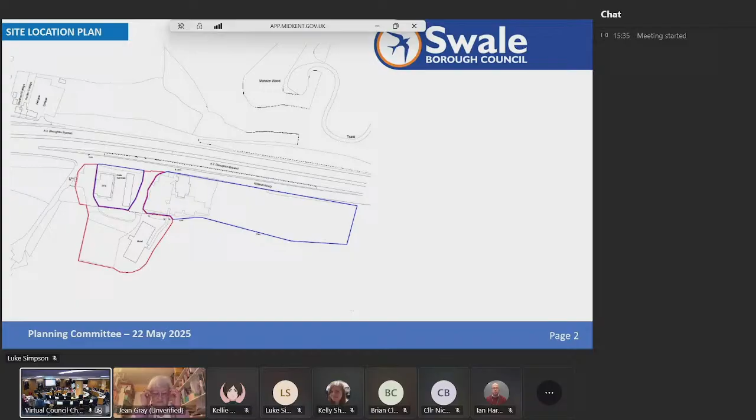Sorry, apologies for that. So as you can see, it's situated between A2 London Road and the Blean Woods South local wildlife site, which encloses the site to the east, south and west. The woodland is designated as protected ancient woodland. It's covered by tree preservation orders.

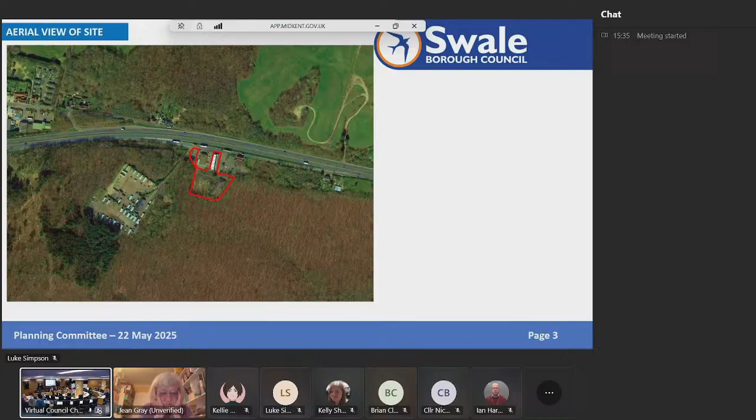There's just an aerial image just to provide a little bit more context. The application seeks consent for the construction of a new restaurant with drive-through facility, car parking, landscaping and associated works, following the demolition of the former hotel, which has already occurred following a successful demolition notice application that was previously submitted. The new restaurant will be located on an existing area of hard standing to the south of the petrol station, with the location of the former hotel being utilised for the provision of car parking and landscaping.

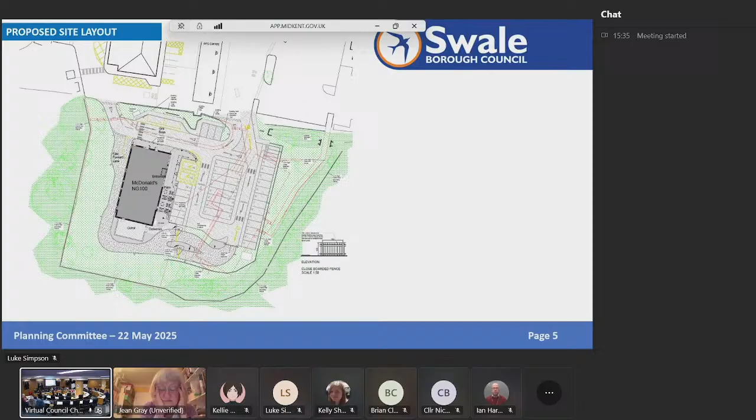It will be accessed through the service station service area, and the existing openings to the site would be maintained with a new internal route arranged to circulate traffic around the petrol station. In total, 37 car parking spaces will be provided, in addition to 2 disability bays, 4 motorcycle parking spaces and 3 or 4 EV charging bays to be confirmed.

An extensive landscaping scheme is proposed, which includes the planting of a significant number of native species along the southern and western edges of the site, as well as a new landscape strip, which is proposed to enable retention of vegetated screening along the northern edge. A large area of mixed planting and scrub is also proposed along the eastern and southern edges, which would provide a buffer to the ancient woodland.

The landscaping scheme also forms part of a detailed biodiversity enhancement plan, which when combined with the purchasing of habitat units for off-site habitat contributions, would provide a 10% net gain to meet the requirements set out within the Boughton and Dunkirk neighbourhood plan.

Now this slide shows the elevations of the former Travelodge, and I think it's worth noting that the site has been part of a roadside service area since 1976, and for many years has provided parking and services for the former Travelodge and the petrol filling station.

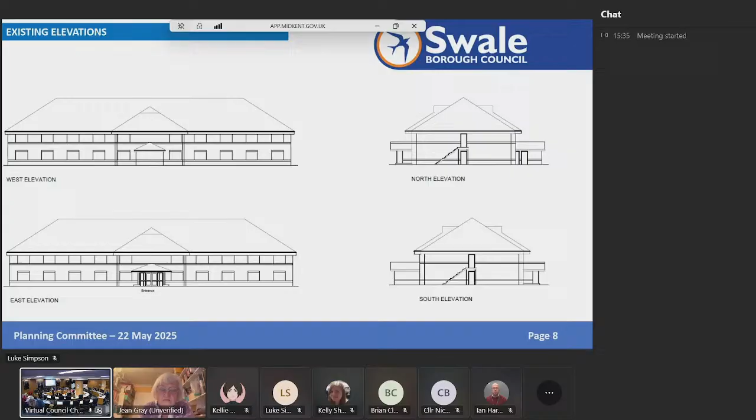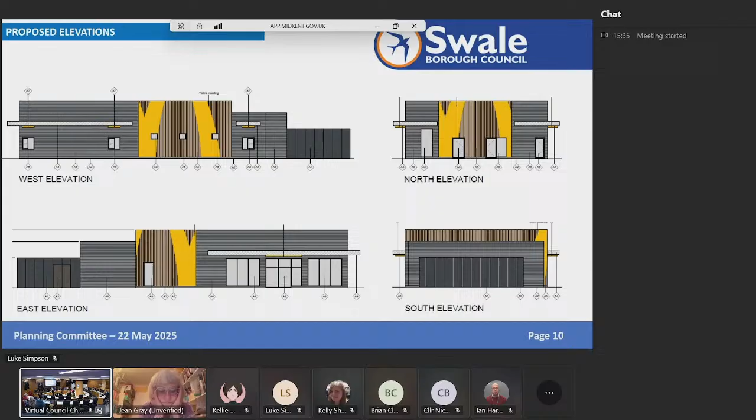Now, just to go for some elevations, that's the proposed elevations of the proposed restaurant. Floor plans and roof plan. The floor plan shows a dining area that covers 79 seating spaces.

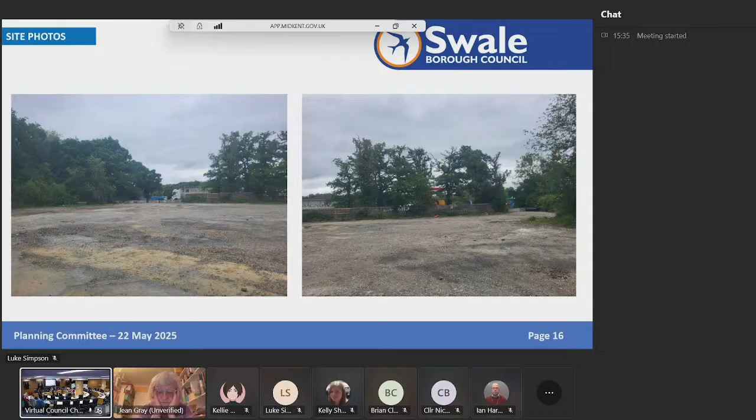And these are images looking back towards the petrol station and shows the accesses there, which would be reutilised for the scheme. Yeah, that's the end of the presentation.

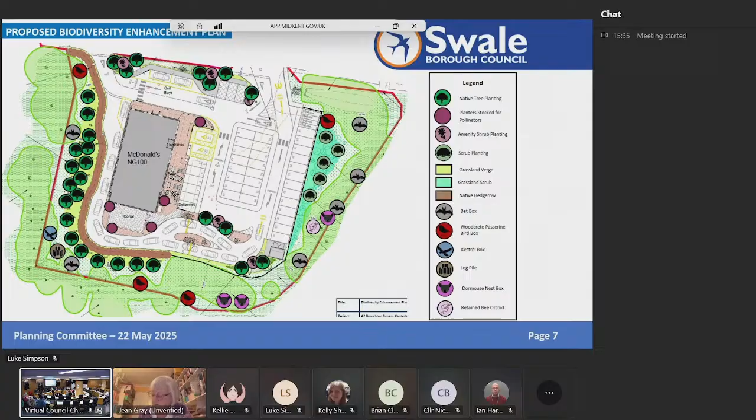Thank you, Chairman. I was born and brought up in Faversham, so I know the area well. There's been a long-standing precedent to a refreshments provision there. The officer said since 1976, as a teenage biker, I remember going in and getting a big mug of tea in there, certainly by 76, and it was not new then. My other half was a trucker in the late 60s. He remembers going in there then. So it's been a long-standing place where people passing can get something to eat or drink.

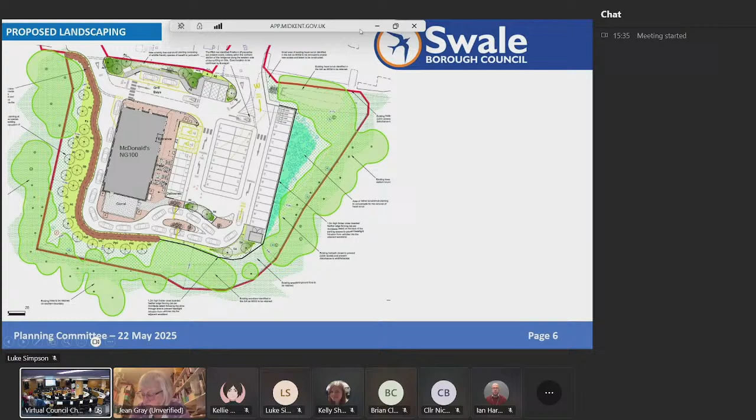In line with the officer recommendation, that is then approved, and for the case officer to issue the letter to the applicant. Thank you very much.

Right, moving swiftly on. We are now on item 7, which is 2.2 of your agenda pack. Application 23-505365, an outline application, land at the rear of Eden Meadow, Newington, Kent, ME9 7JH.

So to start the ball rolling, can we have an officer update, please? Ian: Thank you, Chairman. The only update is that the addendum has been circulated. It sets out that the parish councillor has withdrawn their call-in, and sets out comments of the chairman of the parish council's planning committee, and an interested party has submitted a comment identifying a difference between two different plans, which are indicative because it's an outline application with layout reserved. Thank you.

Thank you, Ian. In that case, there is no objection to this. Is that correct? There are objections from interested parties, but not from... and the parish council haven't stated that they've withdrawn their objection. Okay, cool.

We have, please, Leah Needham, the applicant. Good evening, I'd like to take the seat. The button you've probably heard on the left-hand side. As soon as you press the button, you have 3 minutes to speak. Thank you. Good evening, members.

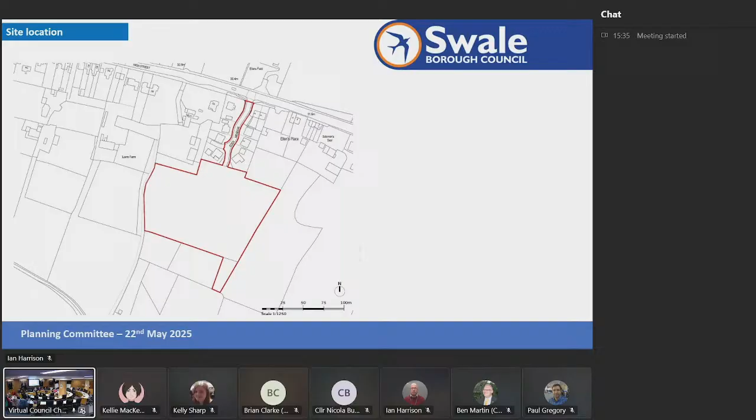That's actually a drawing. Have you actually got a photograph of the land, of the ground? If I may, Chairman, that's an illustrative layout - it is an outline application. So this is only indicative, but that is the indicative layout. That's the best you're going to get, that's obviously all you can show me tonight. Okay, yeah, thanks. Is that all right? Well, I would like to have seen a photo, but whatever.

Do you know where the site is? I know roughly where it is, yes. Okay, so you can visualise it in your mind. Oh, he's got something up there now, hasn't he? Yeah, oh, here we go. Okay, that's what I wanted. Thank you, Chair. Happy, Councillor Winklis? Yes, Chair. Good.

Councillor Hunt, please. I remember other applications around this site with this committee dealing with it, and we've also got the appeal that was done at the time where an inspector said about the loss of the land. What it says here is that it hasn't just been left, it's been used as grazing. It's not agricultural land, but it has grazing. I think from memory there's been horses on some of the land, and that was an argument made when we looked at it last time. But keeping of horses is different to agriculture, and if no action was taken at that time allowing that, then it's classed as developed land.

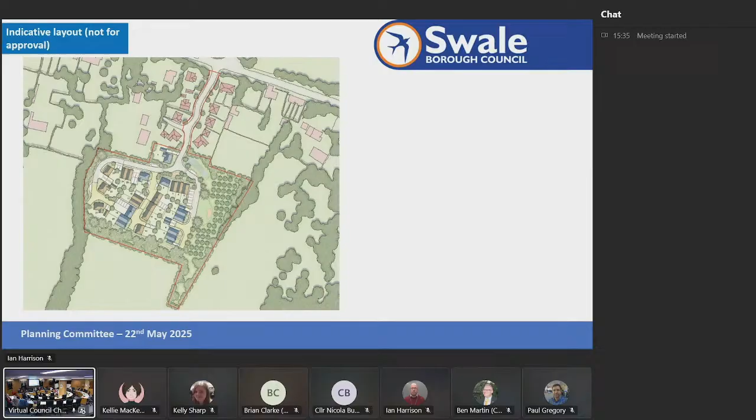And because of that, and we saw the photo there, you can see it's not just been left, it has been used. There is an appeal decision which is law that we can't go against. I don't think there's any argument that this land can't be used, and everything else is well covered in the report, and the parish council and ward member have withdrawn objections. So if that had been done before, it probably wouldn't have even come to committee and would have been delegated to officers to approve. So I see no reasons to go against that recommendation.

Thank you, Councillor Hunt. Anybody else? Great. So with the appropriate wording, Councillor Baldock, do you want to put that on the floor?

Well, I just wanted to check that map, that photo he's got up. Is that a public right of way through the middle of it?

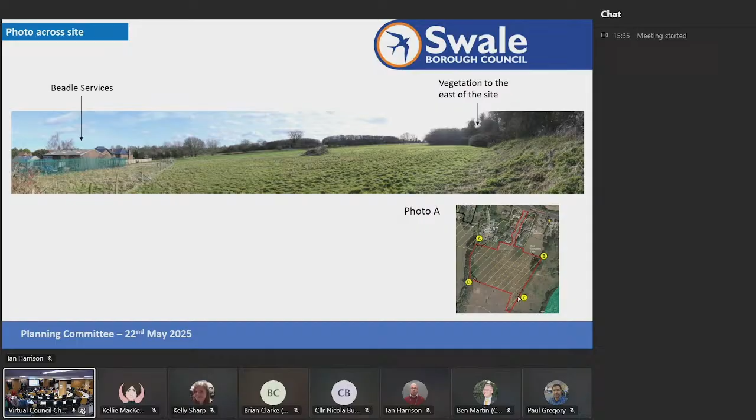I don't believe so, Councillor. Just a path that people use.

So the wording that you suggested, or Ian has suggested, are you happy with that? As an amendment, yeah. Members happy with that?

Superb. All those that has been proposed and seconded, all those in favour of the application, please show. 1, 2, 3, 4, 5, 6, 7, 8, 9, 10, 11, 12, 13. Those against? That is 1. Any abstentions? That is none. Therefore, the application is therefore approved as per the recommendation.

Thank you very much indeed. We're doing very well.

Agenda item 2.3, on page 141 of your agenda pack. This is application number 25-500-154-Alpha Delta Victor. Can I ask you please to put a warm welcome to Kelly this evening.

This is her maiden speech. And Kelly, can you give us a brief update, please?

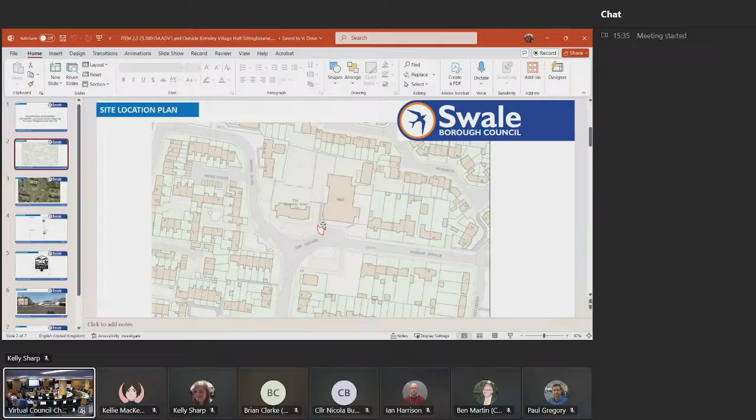Sorry, thank you, Chairman. So, with regards to this application, it's for an advertisement consent. The first slide is the site location plan, and you can see the red boundary of the site. This is where the sign is proposed to go. It's to the front of Kemsley Village Hall, and the land is council-owned land. There's an aerial screen, outlined in red there.

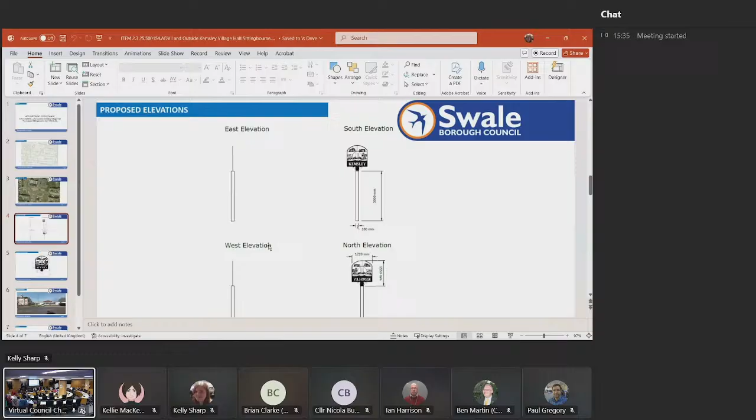The next slide is the proposed elevations. If I'm going too fast, let me know. The next slide is a closer view, showing materials as well as the scale of the proposed sign. And then the last is the photograph of the site - you can see the piece of land here. That's the end of the presentation.

Kelly, thank you very much indeed. Through the chair, I shall propose a recommendation. Councillor Braun, thank you very much indeed for seconding. Members, any questions? Councillor Baldock.

I think it's very nice and will be a welcome addition to that community. I endorse that. Thank you.

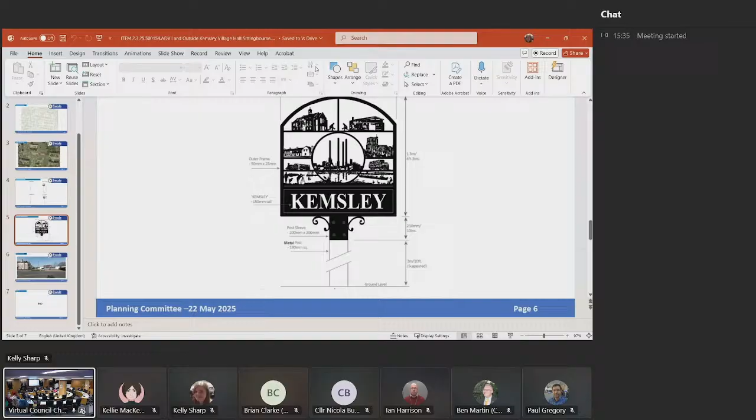No further hands. All those in favour, please show. That is 14. Those against? 0. Any abstentions? 0. Thank you very much indeed. And well done, Kelly.

Okay, now we go back, members. You'll see the reasoning for it. This is agenda item 1.1. This item was deferred and is subject to an appeal. It doesn't matter whether you're at the first meeting or not. You're looking at this application as a fresh application this evening. So please bear that in mind.

I'm gathering my thoughts.

Ian, can we have an update, please, if there is an update? There's no update, Chairman. Thank you very much.

I then call Nicola Butlin, representing Borden Parish Council, who I believe is remote. Nicola, are you online and can you hear us? I can. Superb. You have 3 minutes, please, from when you start speaking.

Thank you. I am here on behalf of Borden Parish Council, who object to this application and would like to reiterate the following. The land is categorised as Grade 2, 3A and 3B agricultural land. Development on grades 2 and 3A go against Swale planning policies and national guidelines not to develop best and most versatile agricultural land. During this time of reduced food security and declining global yields, it would be unwise to take it out of production. This application is visually detrimental to the setting of the surrounding area of outstanding natural beauty, a huge negative impact to noise and light pollution and the countryside gap.

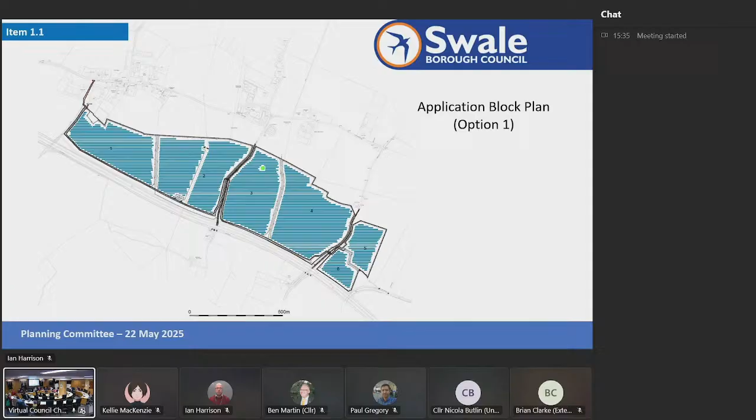You'll spot there's a tree that would be retained, shown with a green spot in the middle. The lines running through the site that aren't the roads are, two of them, public footpaths, and one is the route of the overhead lines. The equipment associated is shown there, with a connection point straight onto the grid at the site.

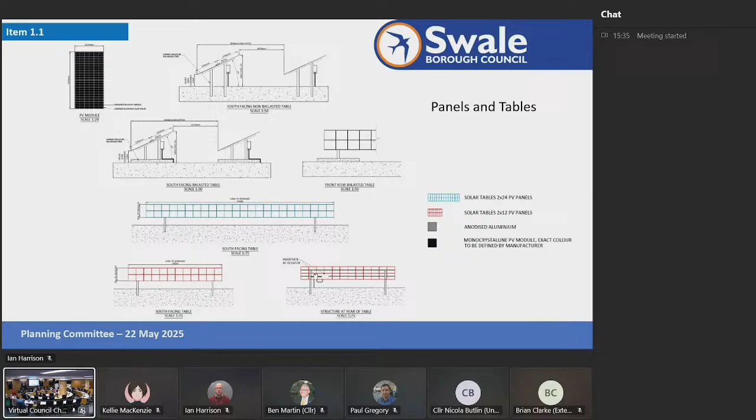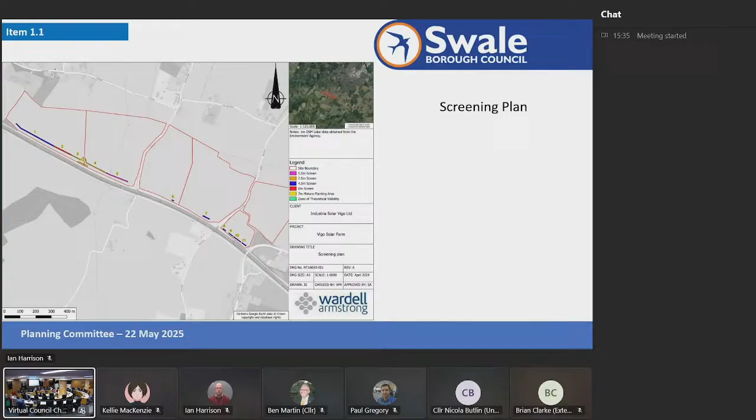This is the agricultural land classification plan, a mixture of grades 2, 3A and 3B.

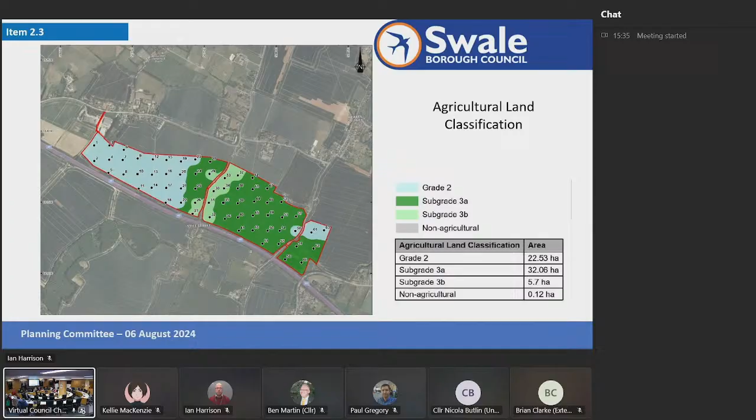This plan shows the footpaths of the area. In particular, I'd flag up ZR128, which runs through the western part of the site, ZR134, which runs through the eastern part of the site, and ZR137, which runs along the western boundary. As you can see, there are many others, but they're the three most directly interacting with the site.

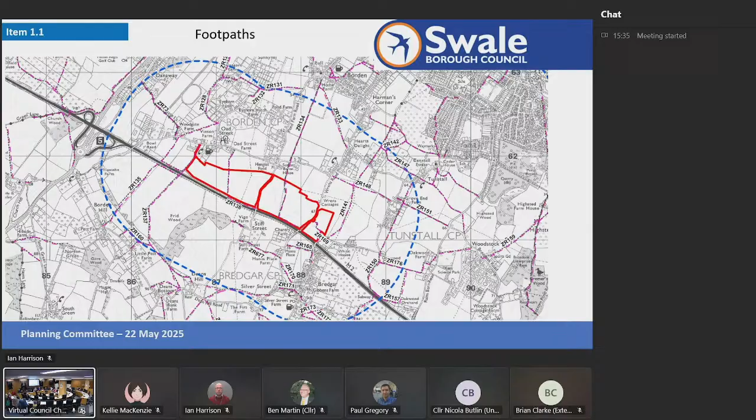Heritage assets of the area, some local. A low level of heritage harm was identified in the officer report at the time, but deemed to be outweighed by the benefits, and it wasn't a reason for refusal. But they are all the heritage assets of the area, so I thought they were worth flagging.

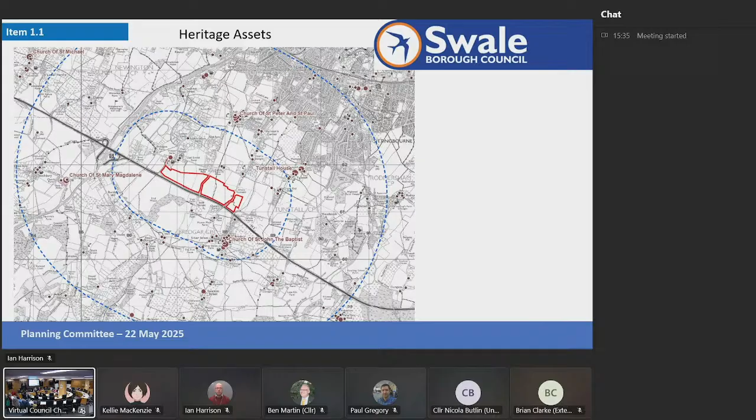The second part relates to the public rights of way, the impact of the construction on the public rights of way, and the experience of the users of the public rights of way, and the knock-on effects for tourism and local use. The third part was the loss of best and most versatile agricultural land.

I stress we're going to toggle between the two a little, but that's the plan that was before you at the time, and that has been the subject of the appeal.

Within the appeal, submissions of the applicant have included option 2. The position of officers is that the changes are quite significant, and so within the appeal proceedings we've put forward the position that the amended plans shouldn't be considered within the appeal.

There's two tests, the substantive test and the procedural test, which come out of case law, and these are set out within the Planning Inspectorate's guidance. The planning inspector has not told us whether they will be acting upon the first or the second set of plans.

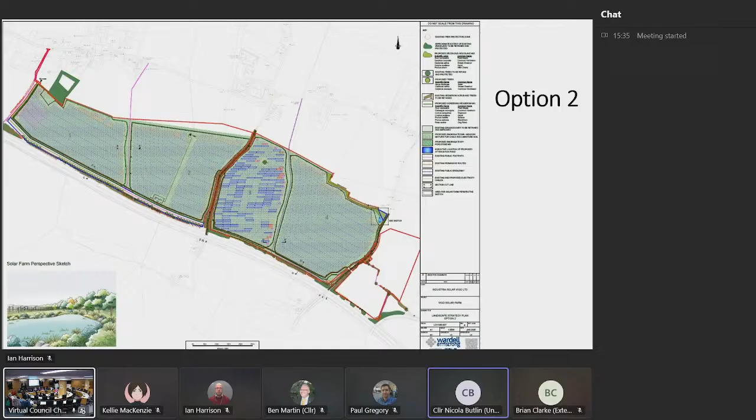At the time the application was put before you, the applicant prepared various viewpoints, 4 of which were worked up into photo montages to demonstrate what the site would appear like upon completion, and again at year 15 once the landscaping has been established. I should stress it's a 40-year permission, which would be decommissioned at the end of it, but they've shown year 15 as the point when it will be established.

I'll now run through the same images because they've done the same exercise for the amended plans, and you'll see the difference. So this is south of the M2 at the bend of Vigo Lane. You can see in the foreground the M2 and the traffic running along it. Upon completion, the solar panels are in that area there. That was option 1, and option 2 is fairly similar.

In year 15, and I'll repeat the same exercise for the view from east, where the 2 footpaths meet to the east of Wrens Road.

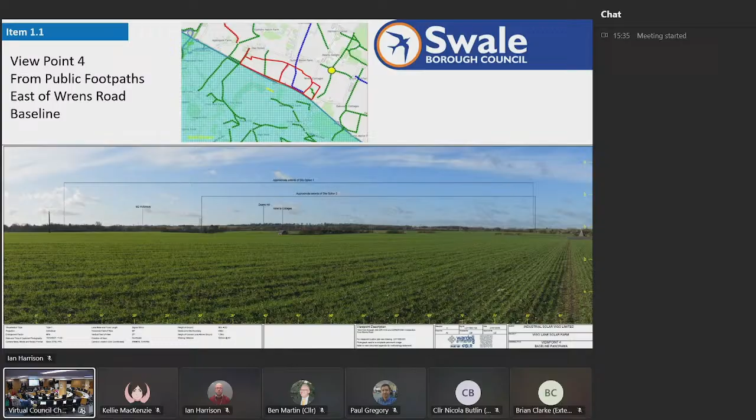These lines are relevant because that top line is effectively the width of option 1 from that angle, and the bottom one is option 2, because they've removed the 2 fields at the southeast. I'd recommend looking at this side because that's where the difference is, but obviously look at it all as a whole. You can see the difference between option 1 and option 2.

And again, year 15 from the same perspective.

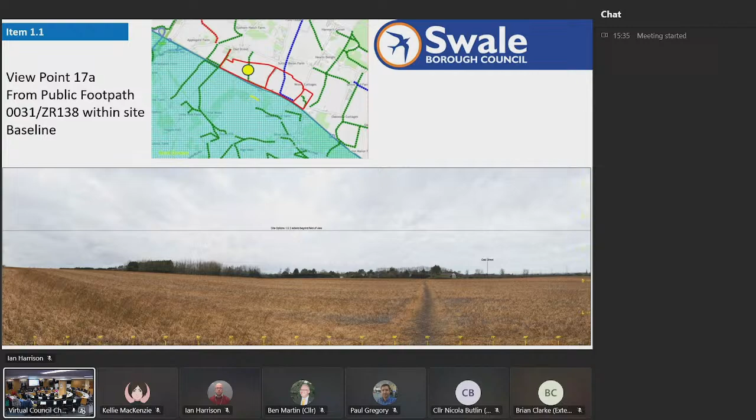17A, this is effectively slap bang within the middle of the site on one of the public footpaths. Upon completion, there is a difference. And year 15.

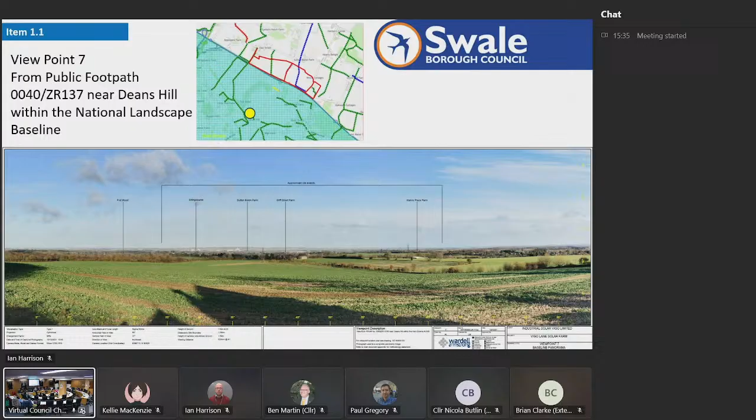And this is the view from near Deans Hill within the AONB, the National Landscape, sorry. You're looking largely in this area here.

Comments from the Public Right of Way Officer have been received since the publication of the report. They state the amendments do reduce the impacts on the public right of way. The fencing and associated landscaping is set back to provide corridors that are wider, in some areas significantly wider, with widths now consistent with those seen on other developments. Users will feel less enclosure as a result, and the removal of parcels 5 and 6 at the east of the site removes the impact on the adjacent footpath. There is inevitably residual harm to amenity given the landscape change, and this must be weighed in the balance, which is what officers and councillors did last time.

In respect of the compound, the Public Rights of Way officer says they'd prefer it further away, but that they'll be using the access from Vincent Farm.

As I've said, the request from the committee is for a steer. There are 2 options before you. Clearly the proposals are different, so it's effectively: do the changes and differences between the schemes lead you to conclude that the amended proposal could be found acceptable, or does it lead you to conclude that although it's different, there are still more harms than benefits to the degree that the planning application should be refused?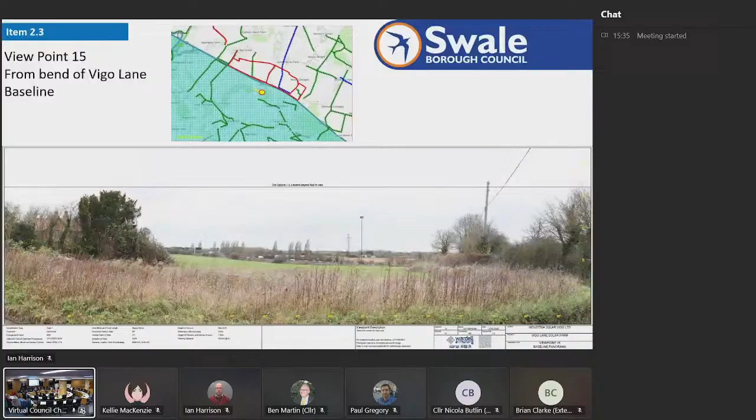Obviously, we're weighing this up against the original proposal, which we refused, and I think the way that this has been dealt with is a bit unfair on our officers because we don't know. The inspector won't tell us which one she's going to consider. So our officers are having to deal with two potential options, one of which they've got a recommendation on, the other one may or may not come forward. So I think this is a bit unfair to our officers, the way this is working out. And of course that's why, because we haven't recognised the amendment, because we don't think it should be an amendment, it should be a new application, we don't do the consultation.

Looking at this, the impact of this one compared to the original one, it is mainly the loss of the eastern fields and a little bit towards the north in the middle. I don't think it addresses our first objection. It will still result in the industrialisation of the site. It will still result in moderate adverse effects on the landscape and visual character, as our officer noted. It also has an impact on what used to be the Kent, or whatever it's now, Kent National Landscape.

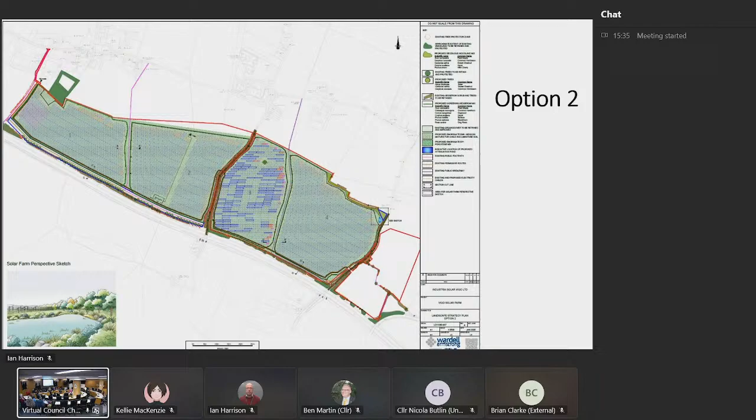So, we're talking about option 2. Yep, that's what we're talking about today. I want a simple agree or disagree.

Okay, so if you agree with option 2, the answer is agree. If you disagree with option 2, the answer is disagree. And this is just a sounding board for the officers during that process of the appeal. Yep, so that would be A in the context of the report, so we are voting for A. Just to make it clear.

We're voting for A, yeah, which is the revised. Voting on A. Okay, yes, let's not get confused. Ian, for clarity—

Thank you, Chairman. Reading the room, I think you're voting on whether you take option A there, which is that you conclude the amendments to the proposal are sufficient to make the proposal acceptable, and that is the way we proceed, and that is finding option 2, plan, acceptable. Perfect, clear as mustard.

Councillor Baldock. Against option A, disagree. Councillor Booth, for. Councillor Hayden Brawn, for. Councillor Anne Kavanagh, for. Councillor Simon Clark is not here. Councillor Lloyd Chapman. Councillor Kieran Golding, for. Councillor James Hunt.